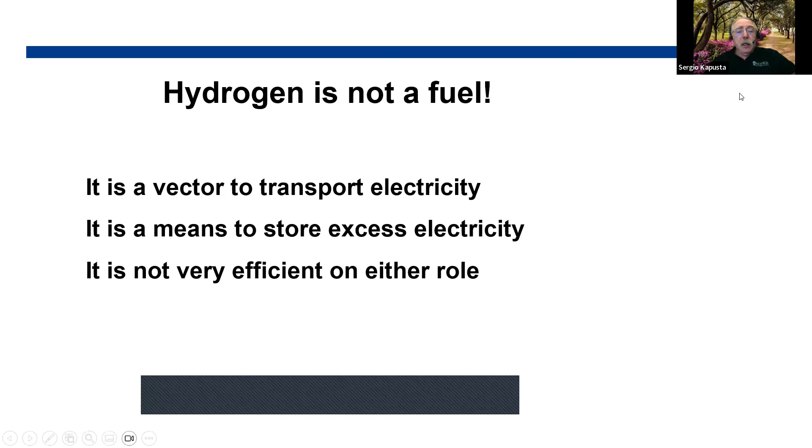Hydrogen is the way to produce ammonia, and ammonia is the basis for many of the fertilizers. The other factor driving the growth in hydrogen is the use in refining. In refining, it's used to clean fuels, essentially to eliminate unwanted elements like sulfur and nitrogen. And as the need for gasoline has grown, so has the need for hydrogen.

So over the past year, there has been a large increase. The latest figure that I have was for 2021, and that is 83 million tons per year that are being used. And approximately 80% of that is mixed about half and half between refining and ammonia, or chemicals in general. There are very few or no applications for transportation, for example, or for other things like decarbonizing other industries.

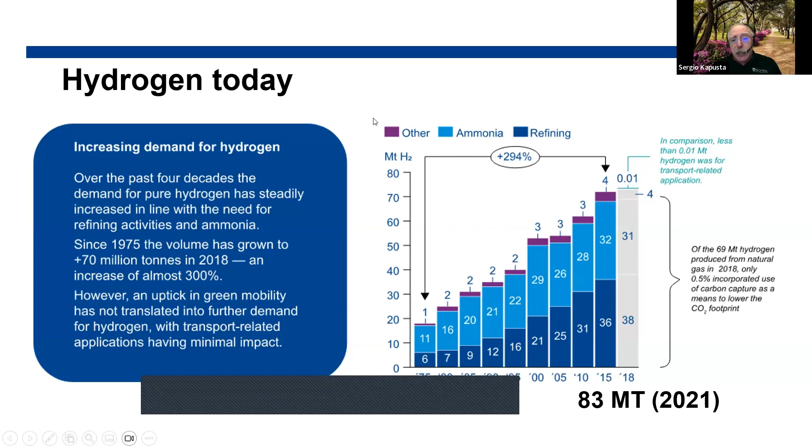If you can capture the CO2 that comes from steam methane reforming, then you will have maybe blue hydrogen, which, if you capture all the CO2, will be pretty good hydrogen: no contamination, no greenhouse gases, no changes in climate. So here are the methods for producing hydrogen that we have today. The steam methane reforming is on the top. You can see here that you produce about 5 times more CO2 by weight than hydrogen.

Now, electrolysis, in principle, sounds pretty good. We will talk about the thermodynamics of it in a second, but it's not a cheap method. It's pretty expensive, and the reason is the electrolysis part is not cheap. First, you need electrolyzers. Second, you need clean water. And third, you need to concentrate that hydrogen. The hydrogen that comes from the electrolysis, you need to pressurize it in order to move it.

So essentially, the main problem with electrolysis, and I'm jumping ahead to the next slide as well, is the efficiency of electrolyzing is about 70%. And this efficiency is not something that you can increase by investing more money or by making more. It's not that with time it will be better. This is more or less a thermodynamic problem. There's a component of the hydrogen electrolysis which is entropy.

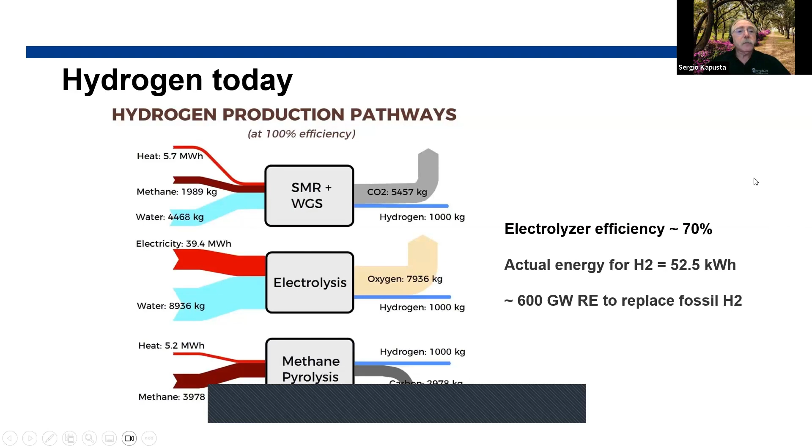So as I said, 95% of the hydrogen is produced by unabated steam methane reforming. It is expected by some that the hydrogen demand will grow from where it is today, which was 87, 88 megatons per year, to 200 and some megatons per year in 2050. The question is, is that reasonable? Where is that demand coming from?

For the next 10 years, the low carbon hydrogen made by electrolysis or by capturing the CO2 will be used for decarbonizing the existing uses. They will be used to decarbonize the hydrogen for ammonia and the hydrogen for refining. And then there will be more demand for something else.

But what is that something else? Because it is a market that doesn't exist. And making assumptions and predictions that it will grow by some 200 million tons per year in 20 years is a little bit out of the normal range of predictions.

So ammonia production, yes, it will increase. But on the other hand, refining needs: if all the fleet of combustion engine vehicles is replaced with battery operated electric vehicles, there will be much less need for refining, and therefore there will be free or homeless hydrogen out there trying to find a home.

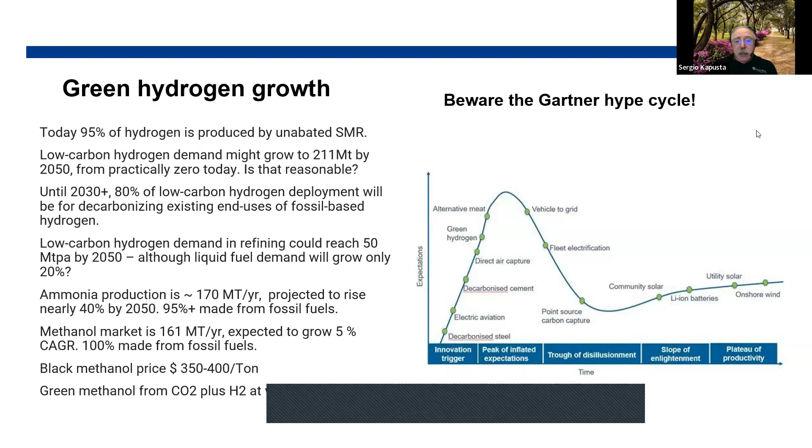I'm less optimistic now. So first, what green hydrogen is not. In many cases, it's promoted like a Swiss Army knife of chemicals, so it can be used for everything: for electricity, for transportation, for replacing other chemical processes. But there are other low-cost options. And yeah, hydrogen would be a Swiss Army knife, but you can see this Swiss Army knife tries to be everything to everybody, and it's not very practical. I don't think anybody's making and selling this type of machine.

What hydrogen is not: it is not a low-cost option right now. $5 per kilogram is what somebody mentioned earlier, and well, maybe that is the starting point. Can it be lower? These are things to be decided. It's not lower yet. It's not an efficient energy storage option. As I said, if you store it to produce more electricity later on, you have lost about 60% of the original energy in that conversion. And there are other methods for storing energy which are much more efficient than hydrogen.

It is not really a convenient automotive fuel. It is claimed that you can refuel in minutes, and it has very large range. You can drive forever. Those things are to be proven, because right now there are no large fleets of hydrogen vehicles, and you don't know when the refueling goes into the public whether it's going to be safe, fast, and all that. And the competition is not standing still. Battery electric vehicles are also improving, and very rapidly. So who's going to win that race?

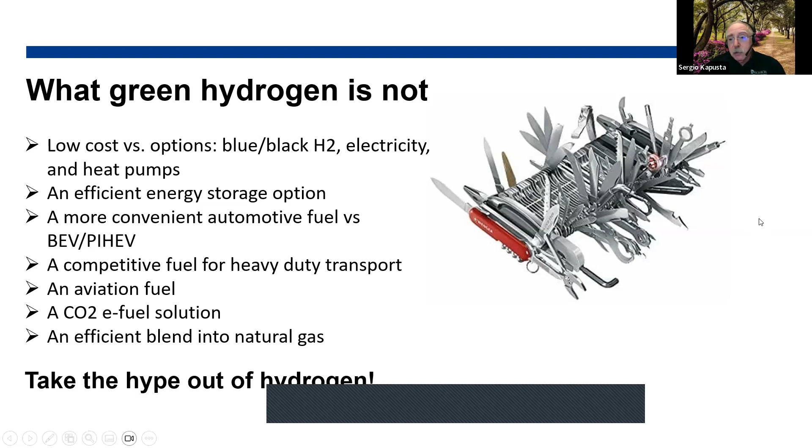So, yeah, I don't want to put too much into the thermodynamics, but you need 52 kilowatt hours per kilogram to make the hydrogen, and you can only recover 39 or less than 39. So this is more or less cast in stone, at least today. Thermodynamics hasn't changed in the past several hundred years, so I don't expect that it will change in the next 10 or 20.

But there are other ways. If you want to store energy, methanol is a much more efficient system because you don't lose as much, and you can recover a lot of the energy that you have put into making the methanol when you burn it again. I'm not recommending methanol as a fuel, but if necessary, for example, for aircraft or for shipping, you have that as an option. Ammonia is equally convenient, and it's also good. I won't put it in an aircraft just in case there's a leak, but for container ships, maybe.

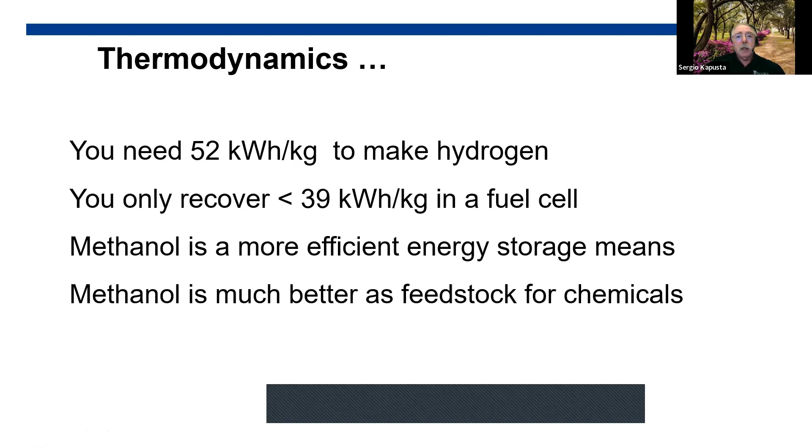Okay, so, sorry about that.

Here, I said thermodynamics is a challenge for hydrogen. Well, this is just one example, and it's not current. Actually, the situation is a little bit worse than what it shows here. But if you start with 100 megawatt hours of electricity, and you want to compress or liquefy the hydrogen, and then use it for producing electricity again, what it says is that you could get maybe 20% of the original energy, and the maximum would be about 48%.

It doesn't matter whether this is renewable or gas driven or whatever. It's not free energy. The electricity is never free. You could use this in other applications that actually replace hydrogen, and you don't lose the 50%, 60%. If you lose that much, it means you need to generate that much more renewable energy in order to sustain the hydrogen. And what sense does that make?

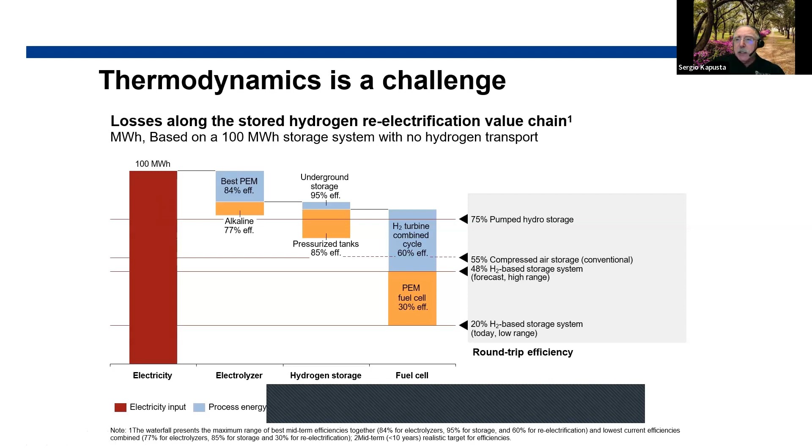And here's what I was saying: exporting hydrogen is not as easy as exporting natural gas, for a simple reason. Natural gas can be liquefied at 1/5 of the energy needed for hydrogen. Hydrogen is very difficult to compress, it's even more difficult to liquefy, and you lose a lot of the energy just in the compression and liquefaction, and the boil off. Hydrogen is not as easy to contain as natural gas or liquid natural gas. It's a small molecule with a lot of mobility, and it takes any escape route and just escapes.

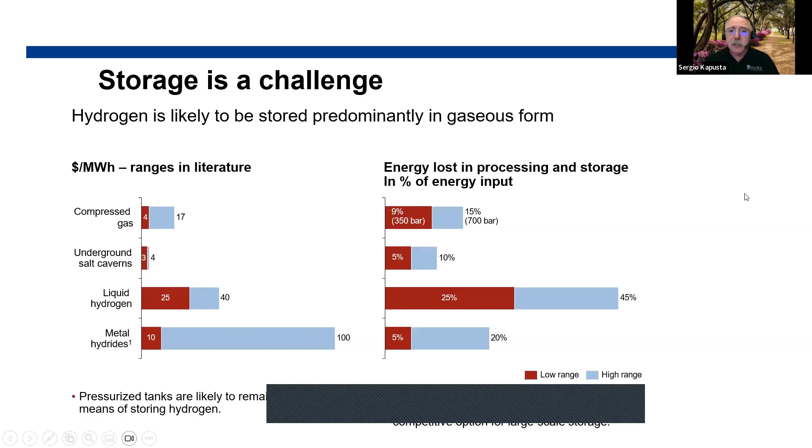So it hasn't been proven that you can export hydrogen long distances, like from South America to Europe or to Japan. And many people have that. And this is the final comment that I have about the issues with hydrogen. For electric vehicles, the train has left the station.

So electric vehicles with battery-operated vehicles is not even a competition anymore, because on the bottom left, you have how many battery-operated electric vehicles are sold every year, and we're getting to 1 million and more. I think it's worldwide, I don't think it's the US. And on the right is how many fuel cell vehicles we have sold over the years. And it's not a mistake of the picture, it's actually zero. So nothing has been sold.

The other one has 1 million and more, and Tesla is a pretty good competitor, and there are others that will not just sit down and let hydrogen take off. So the competition has finished, and the battery electric vehicles seem to have won by far. Not only that, but for long distance heavy trucks, the batteries are getting better, and weight is not a problem for transportation. It's more the volume, and it can be accommodated. So there are batteries that can move heavy trucks, and Tesla has shown it, but others have also shown it. But what has not been shown really is that hydrogen can be used, because there are no hydrogen refueling stations.

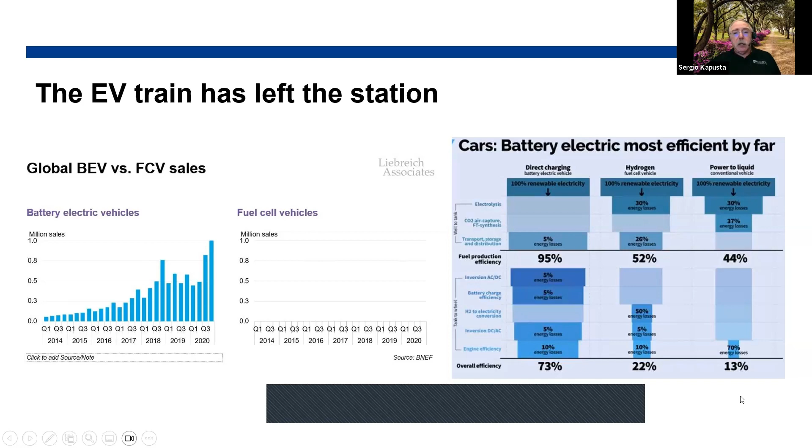All right. My take-home messages: green hydrogen can replace the black-blue hydrogen that we are using now in both refining and chemicals for ammonia and others. Hydrogen for transportation faces thermodynamic, commercial, transportation, and cost challenges. So if you can solve all those in a few years, then maybe. Otherwise, the hype cycle that we see for hydrogen, in my opinion, is driven by government subsidies. The US has put billions of dollars into hydrogen. The European Union has done the same.

And the question is, well, it's easy to work when you get free money from the government, but is this a business, or is it just the hype? And hydrogen export is unproven. So far, it hasn't been done. So expecting that in 10 years we will be exporting millions of tons of hydrogen across the world, yes. But who actually has confidence that those numbers will be realized?

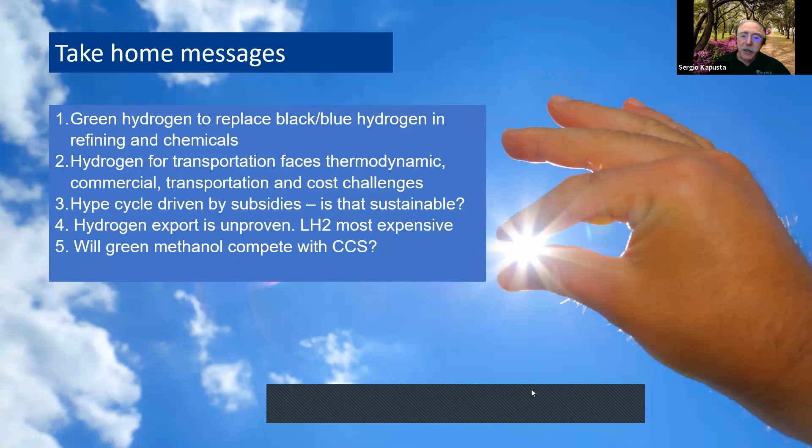All right, thank you very much. I will let Laura give you a better, maybe more optimistic picture of hydrogen. In my case, it's not optimistic. I try to be realistic, and you can make your own mind about it. Thank you. Laura, it's all yours.

Thank you very much, Sergio. Just a moment, I will try to share my screen with you. Can you see my screen? Yes. Excellent. Thank you very much.

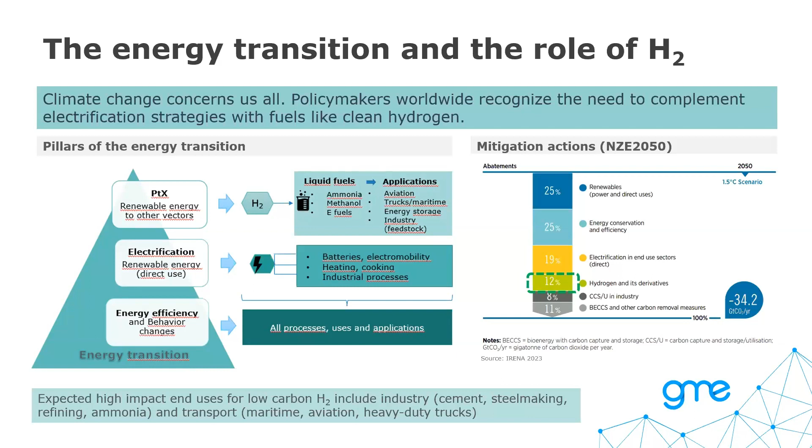So what are the key factors to deploy large-scale hydrogen projects? The main driver behind the development of the low-carbon hydrogen route is, as I said, to mitigate climate change. These pathways, as Sergio already mentioned, are not cost competitive yet, and the technologies are not totally mature. Despite these challenges, there are nearly 1,500 announced projects globally. However, these projects announced at commercial scale are in their early stages. Only a small proportion, around 10%, has reached the final investment decision stage.

The main importing regions, such as Europe, Japan, and South Korea, are working on promotion schemes and certification mechanisms to boost the deployment of low-carbon hydrogen and carbon capture, sequestration, and utilization techniques. Which brings me to my next slide. This graph intends to illustrate the key common attributes of the most promising projects within this database of more than 1,500 projects worldwide.

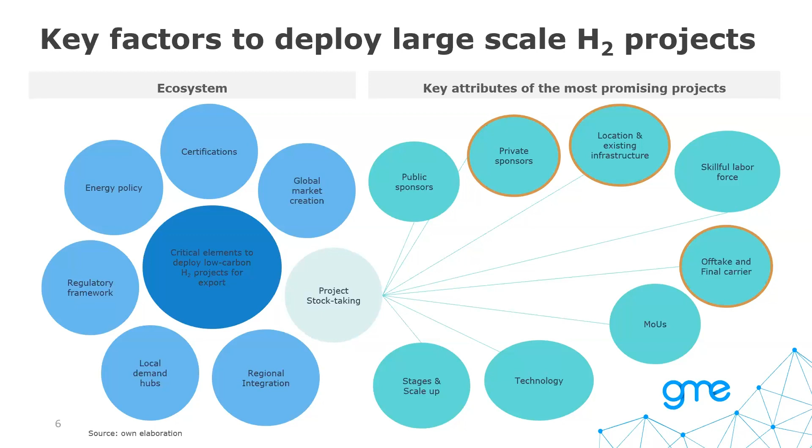But usually they define locations near an existing port, mainly to leverage existing infrastructure and initial local off-takers in the industrial complexes that are usually near the ports. Also, the existence of an off-taker and the selection of the final carrier is, I would say, the cornerstone of any project. And nowadays, finding an off-taker willing to pay the green premium for these clean products is a challenge.

Focusing on this consortium approach that I was mentioning, I brought here an example in Australia where the sponsor chain involved in moving this project forward is composed of many companies with know-how in the different segments of the value chain. This project is located in Queensland, Australia. It is a large-scale renewable hydrogen production facility and also a liquefaction plant at the port of Gladstone. It aims to export liquid hydrogen to Japan and also to supply hydrogen and ammonia for the domestic market. It is anticipated that the project will be producing 200 tons per day of hydrogen by 2026, scaling up to 800 tons per day by 2030.

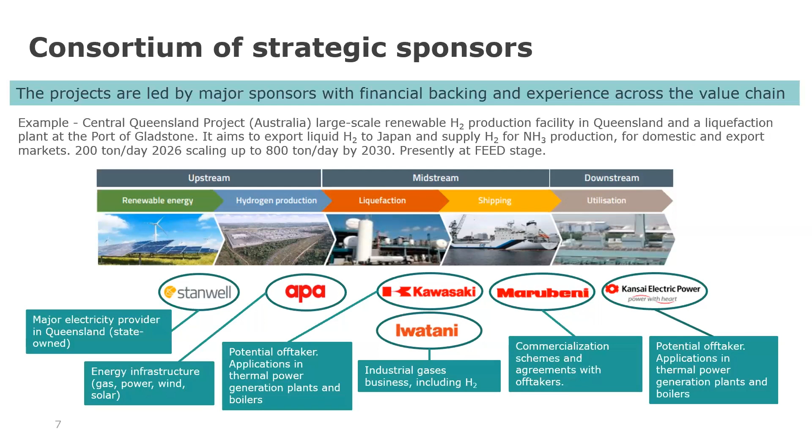Presently, this project is at the FEED stage, and as a reference, these stages of 200 tons per day and 800 tons per day by 2030 roughly means close to 500 megawatts of electrolyzers in the first stage and close to 2,000 megawatts of electrolyzers by 2030, which means that if the renewable energy comes from a combination of wind and solar resources, that would roughly mean almost double the capacity of these renewable sources. Just to have an idea of some numbers and some figures.

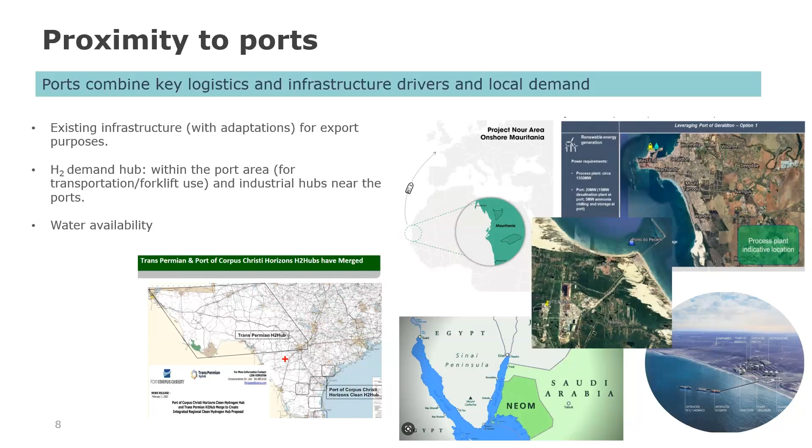The proximity to ports, as I was also mentioning, is very important because it combines key logistics and infrastructure drivers and also local demand. All the projects that are announced are thought in different stages, starting with a small scale phase and scaling up gradually over time. So to have an initial off-taker, even if it is of a relatively small volume of product, is important to gain insights regarding all the challenges, not only technological challenges, but also commercial and economical challenges of these projects.

Finally, the off-taker and the final carrier, as I was mentioning, this is central for any project. The most promising projects usually focus on, I would say, two main final carriers, referring to export-oriented projects, which are ammonia and methanol, and following the route of methanol, also synthetic fuels.

Another challenge that all these projects face is the absence of an international market to trade these products, at least these clean products. Of course, there is an international market for ammonia and methanol, but produced by conventional technologies with a carbon footprint much higher than these clean products. There are some initiatives to start creating this market. One is coming from the German government, which is H2Global, to contribute to the development of a liquid market for hydrogen and its derivatives.

And also there are many private agreements, bilateral agreements and MOUs amongst private companies, as I was mentioning, and usually the off-takers of these private agreements are industries currently using gray hydrogen. As Sergio was mentioning, one of the main end uses of hydrogen are the current uses, which is primarily as a feedstock for chemical industry, refining, and fertilizers.

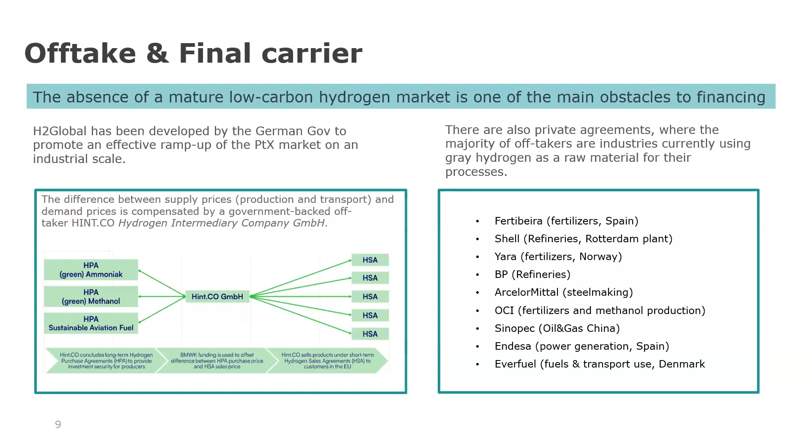And finally, in the last part of my presentation, I would like to focus on the Southern Cone as a competitive region to become a net exporter of hydrogen derivatives. Some production cost estimates. I would start saying that the favorable positioning of the Southern Cone countries to become net exporters of hydrogen derivatives is primarily explained by their abundant natural resources and land availability. On the other hand, the contribution of hydrogen to reduce their own emissions is relatively minor when compared to other actions like direct electrification and energy efficiency enhancements. So there is a surplus that can be produced and potentially exported to importing regions such as Europe, Japan and South Korea.

These importing regions are the ones that are actively promoting the development of hydrogen projects worldwide. Why? Because they anticipate that their demand for low carbon hydrogen won't be possible to cover with their own production, because they do not have enough resources and available land to do so. So this is, I would say, the main driver and why we observe such an interest, not only in the Southern Cone and Latin America; other regions are also being seen as potential exporters, such as Australia, Africa, the Middle East, Canada.

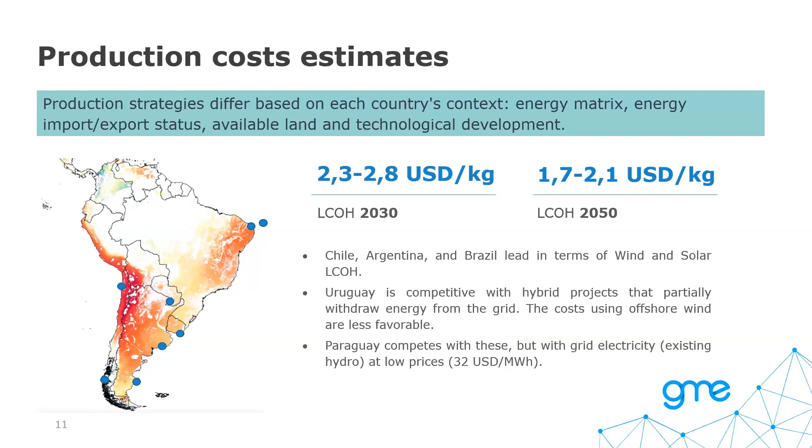So there is a wide variety of options, but unfortunately, none of them is competitive nowadays compared with conventional technologies, such as steam reforming without carbon sequestration. Going to our export potential as a region in the Southern Cone. This is an exercise that we carried out to estimate what could be the relative participation of our region in the potential international trade of hydrogen derivatives by 2030.

We started with the global hydrogen demand estimates. Sergio mentioned some other figures. This 140 million tons per year is an estimation that comes from the Hydrogen Council. There are several other estimations from many international institutions, and there is a wide range of estimations there. But assuming that this is a fair number, at present in 2022, the demand for current uses of hydrogen is about 95 million tons per year.

So assuming this is a figure, and assuming also that the proportion that international trade will represent would be approximately 10% of that, that leaves us with 14 million tons per year. That will be split approximately 12 million tons in Europe and 2 million tons in Japan and South Korea.

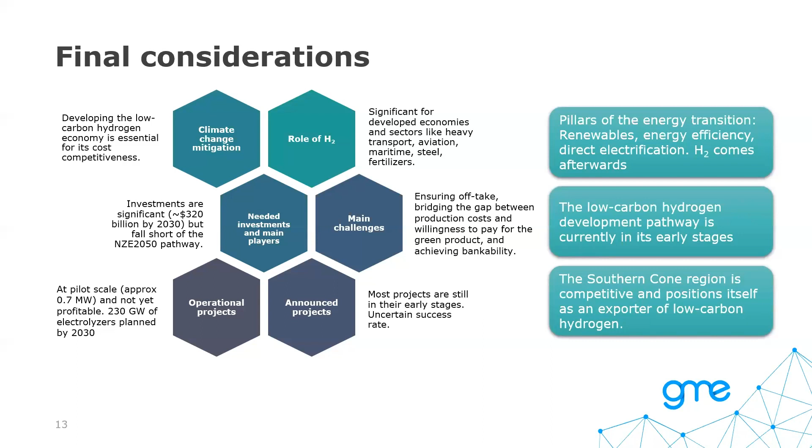Most of the projects are still in their early stages, and that is a fact. It is necessary to close the gap between the cost of producing low-carbon hydrogen and its derivatives and the willingness to pay for the green product. Those are the main challenges going forward, and this pathway is difficult, but in my opinion, not impossible if we put all the pieces of the puzzle together and assign to hydrogen the role that it can play, particularly in the most developed economies.